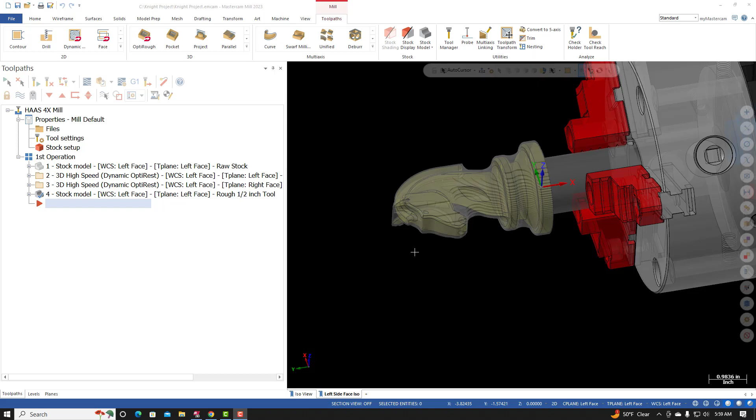Now that we've completed the roughing toolpaths with the 1/2" flat end mill, I can see that I have material left over underneath the chin and around the base. So what we'll do is we'll come in with a smaller flat end mill and we'll focus on just these areas. Inside Canvas, I'm going to the roughing toolpaths with a 3/16 end mill.

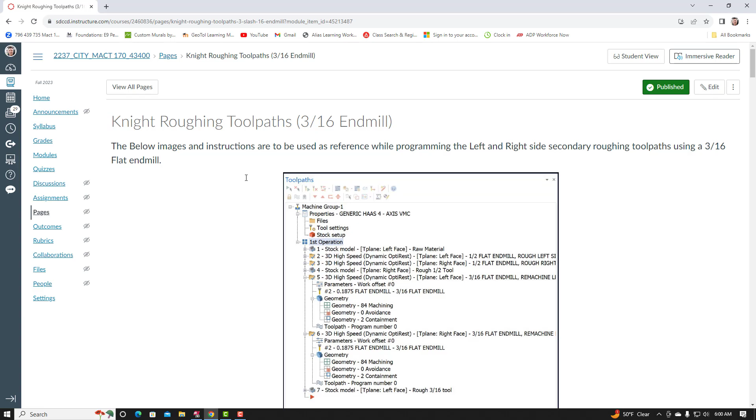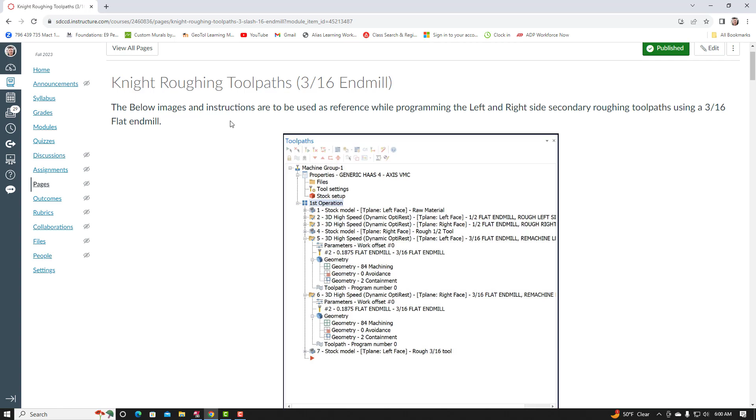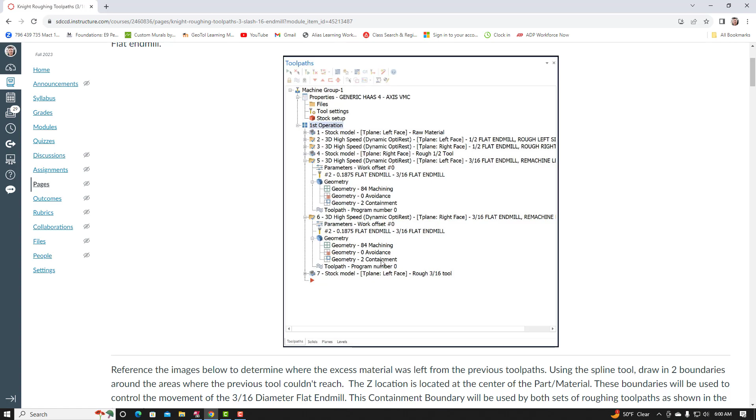This page: the below images and instructions are to be used as reference while programming the left and right side secondary roughing toolpaths using a 3/16 flat end mill. We have an image of the toolpath manager. It has the 2 additional toolpaths added to it. There's some information that we can get from here. It's a 3/16 flat end mill. There will be 2 containment boundaries for these toolpaths.

I'll scroll down. Reference the images below to determine where the excess material is left from the previous toolpaths. Using the spline tool, draw in 2 boundaries around the areas where the previous tool couldn't reach. The Z location is located at the center of the part material. These boundaries will be used to control the movement of the 3/16 diameter flat end mill. This containment boundary will be used by both sets of roughing toolpaths as shown in the image below.

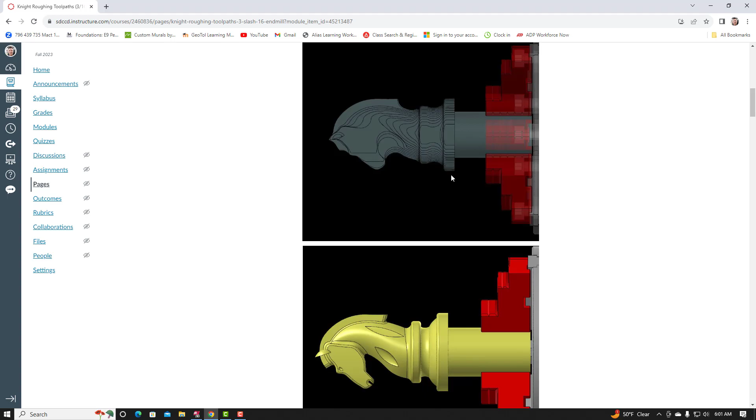So we have a few images to reference. Here is the part after the 1/2" flat end mill roughing toolpath. Here's what the finished part will look like. Here we have an overlay, where we can see the material that was left behind, and we can see these light blue splines drawn in, and they capture the area where the excess material is still located.

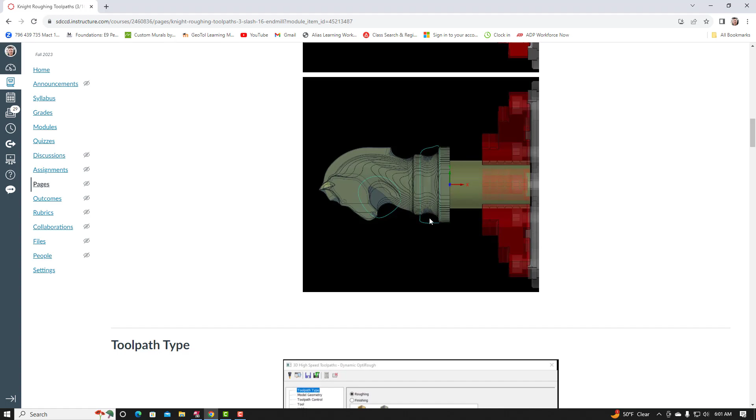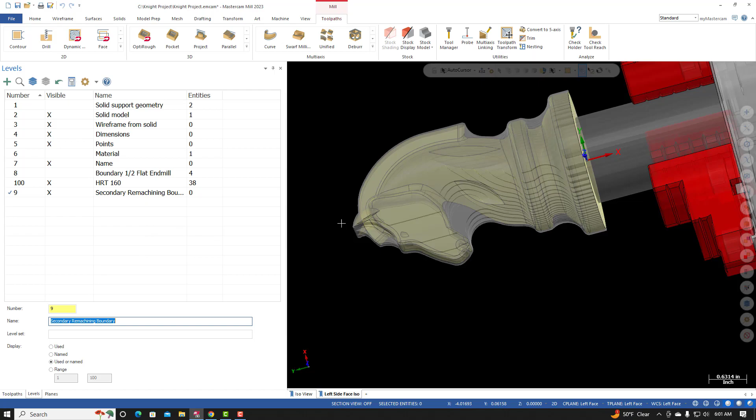So I'm going to go into Mastercam. I'm going to go to my level manager. I'm going to create a new level and call it secondary machining boundary, or remachining boundary. I'm going to look at it from a top view, and I'm going to draw in 2 splines that capture these areas.

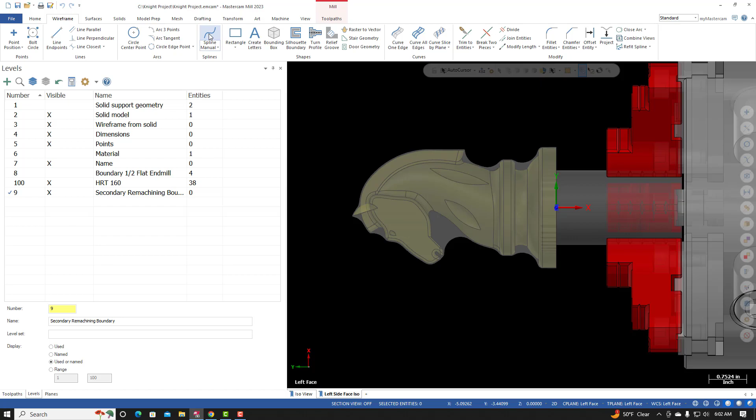I'm set to a 2D construction plane, and I'm going to set my wireframe color to this light blue. I'm going to try and match what I'm seeing in the Canvas page. From the wireframe tab, I'm using the spline tool. Now be careful, your auto cursor will lock on to things, so what I try to do is avoid locking on to existing geometry.

So I'll start here, and I'm going to create a window that captures this area. And if you see your cursor lock onto something, move it away and then select away from the areas that the cursor wants to lock onto. And then when you get close to completing the circle, it will lock onto the last point. That will close the spline.

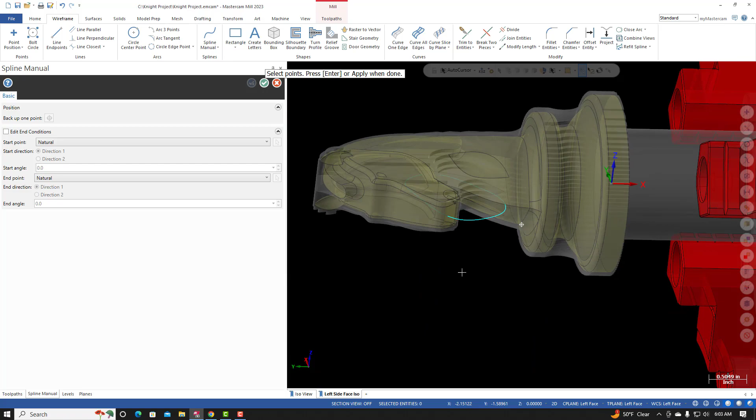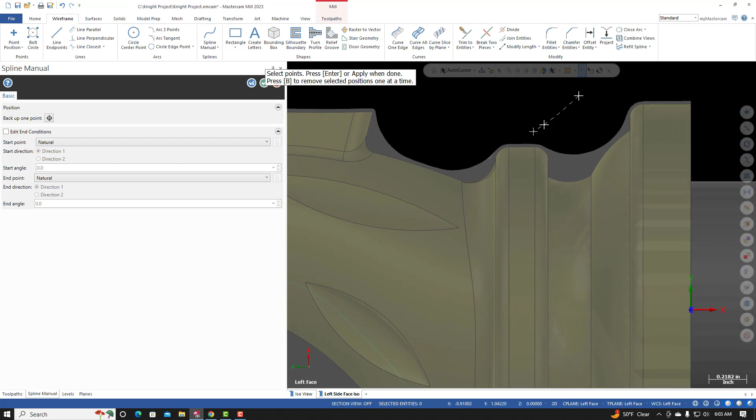And if I tumble my view, you can see that it is a 2D spline. It's all on the same Z level. If it starts to move around, if you're locking onto things, it will turn into a 3-dimensional item. So I'll go back to the top view again. I'm now going to create that spline around this area. So go back to the spline tool. And once again, you can see how it's locking on things. So I'm going to double up the points right there.

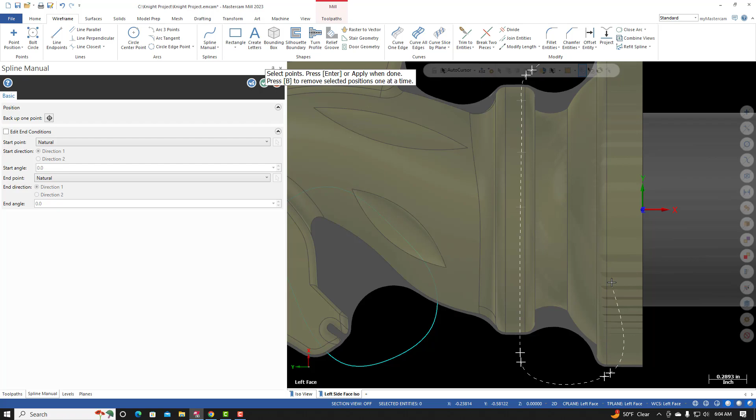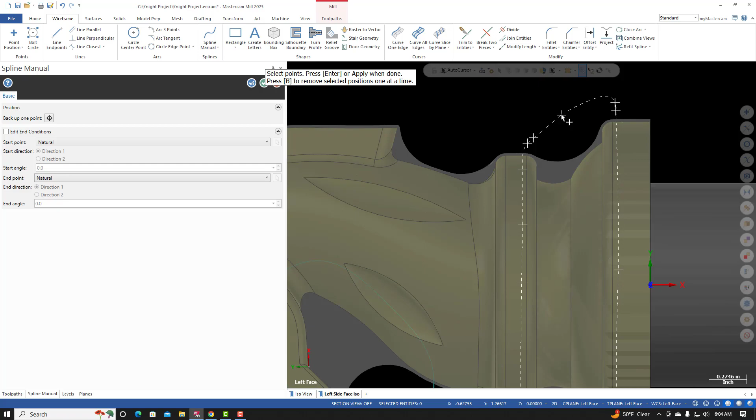It doesn't need to be precise. And I'm going to try and keep it so that it's not too wild, like right here, it's trying to lock on to that. And you have to double up the points at the corners, otherwise it'll get a very extreme arc. So I'll just click there. That'll control the curvature. Here I'll lock onto the point, and that will complete the splines for the containment boundaries.

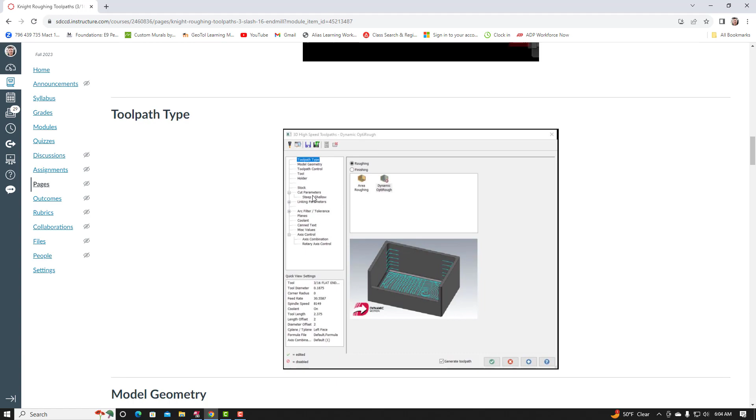I'll select OK. I'll go back to the project page, and we have the pages for the toolpath that we're going to use. We're going to use the OptiRough toolpath again. So I'll go back to Mastercam. I'll go to the toolpath tab, and in the 3D toolpath section I'm using OptiRough.

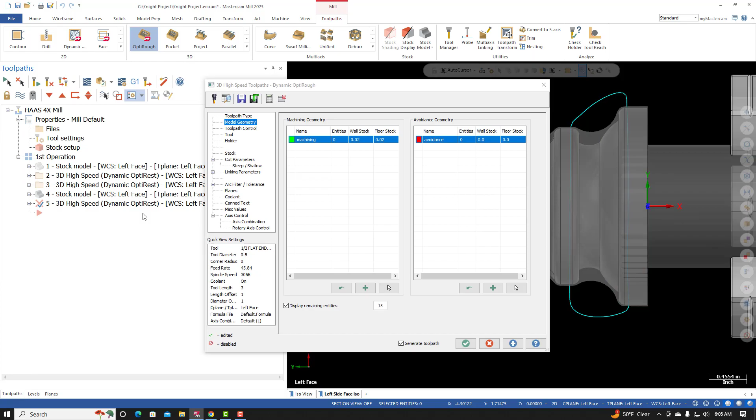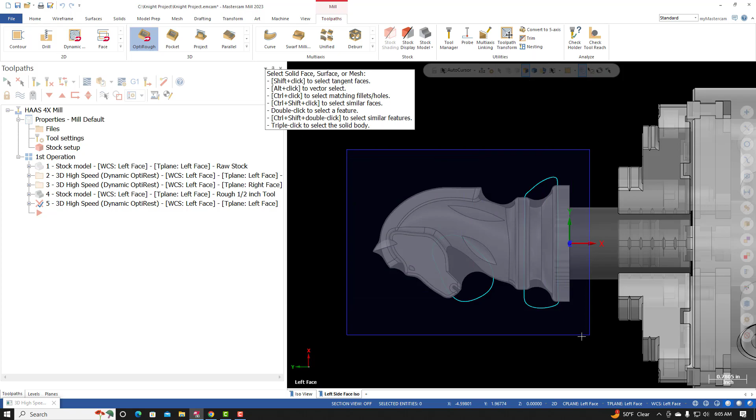For the model geometry, I'm going to select the entire part. So I'll select the Select Entities icon. I'm going to window select the part. You could have triple clicked; there are several ways to select a solid part or a solid model. I did a window select. It ignored the stock model, it ignored my boundaries.

I'll select End Selection, and once again I have 82 entities. I'm leaving 20 thousandths on the walls and 20 thousandths on the floors. I'm now going to start referencing the pages on the project page and matching the settings according to what we see on the project page.

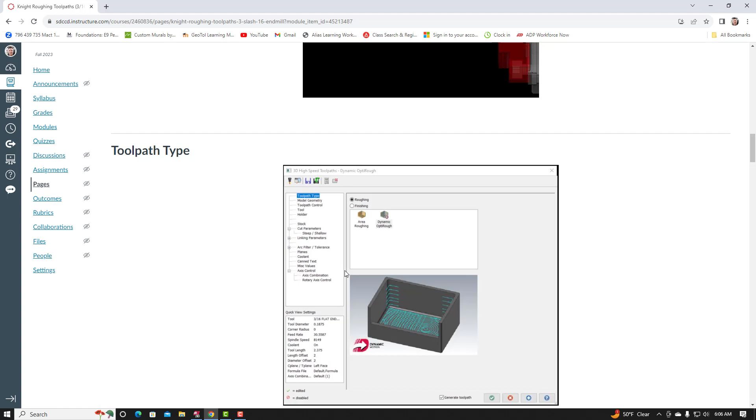So for the toolpath, it is a dynamic OptiRough roughing. For the model geometry, we selected the part, the solid model that represents the knight. For the tool control,

we're going to use two boundaries, and we're going to allow the tool to travel to the center. The center line of the tool will be allowed to travel up to the containment boundary. So I have it set to center.

For boundary chains, containment boundaries, I'm going to use this spline and this spline. And I'll select OK. That will take care of all the settings for this page.

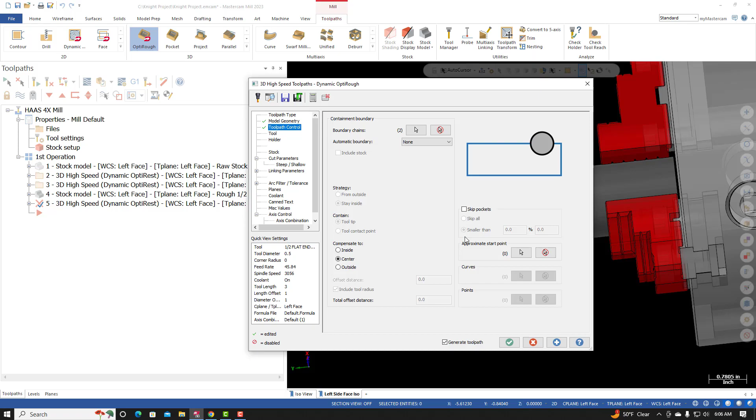Go to the tool. We're going to add a 3/16 flat end mill to our tool list. So select Library Tool.

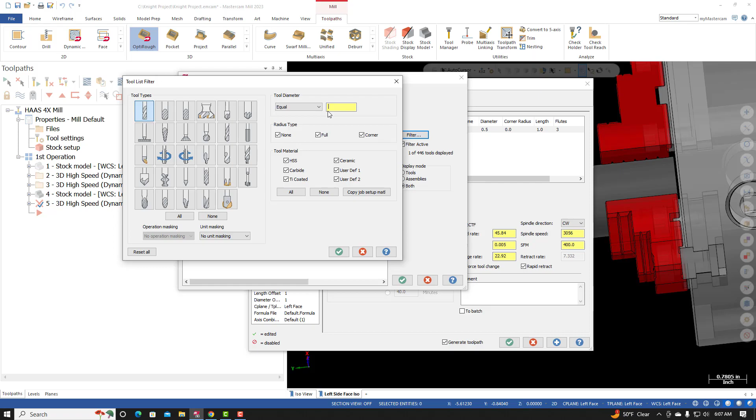My filter is still active from the last time that we selected a tool, so I'll select the filter icon. I'm still looking for a flat end mill. This time I'm looking for one that's equal to 0.1875 or 3/16 of an inch.

I'll select OK. There's one tool that matches that description. I'll double click on the tool and it should be added to my tool list as tool number 2. I'm getting this error again, or this warning. I'll select OK. I'll select 6061 aluminum. I'll select OK again.

And it changed my SFM, but I'm going to edit the tool before I make any adjustments down here. So right click on the tool, select Edit Tool.

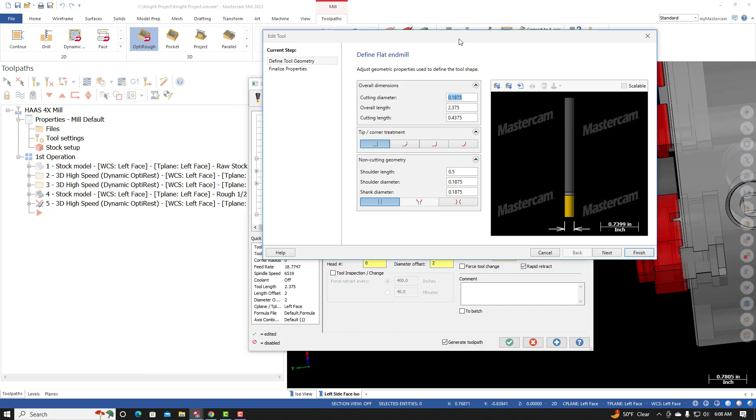On this page, I believe the default settings will work for us. Something we might want to be aware of is the length of cut.

So what we would need to do is actually measure the length of cut of the tool that we have in our tool crib. I'm going to change this so that the length of cut is 3/4 of an inch. So I'm going to go to cutting length, but before I can change the cutter length, I need to change the shoulder length. So let's change the shoulder length to 1, and then the cutter length to 0.75.

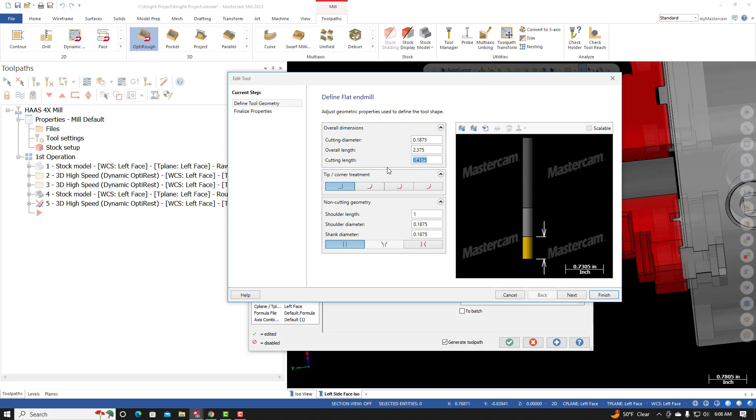From here I'll go to next. The number of flutes I'll set to 3. And then I'm going to turn the coolant on at this level. That way the coolant will be turned on for all following tool paths that use this tool. I'll select Finish.

Back to my tool page, I'm going to set the cutting speed to 400, not 4,400. I'm going to set my FPT equal to 1% of the tool diameter, so 0.1875 times 0.01. And then I'll set my plunge rate to half the calculated feed rate, so 45.84. Divide that by 2. And then I'm going to copy the tool name.

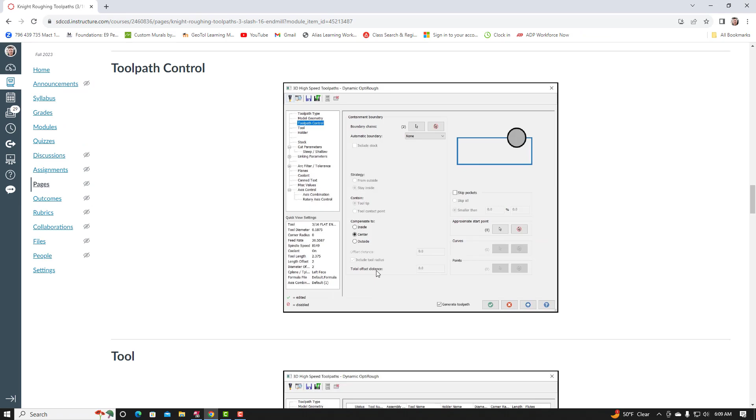And I'll reference the project page for the note. Remachine left side. All caps, remachine left side. And that will complete all of the changes that we need to make to this page.

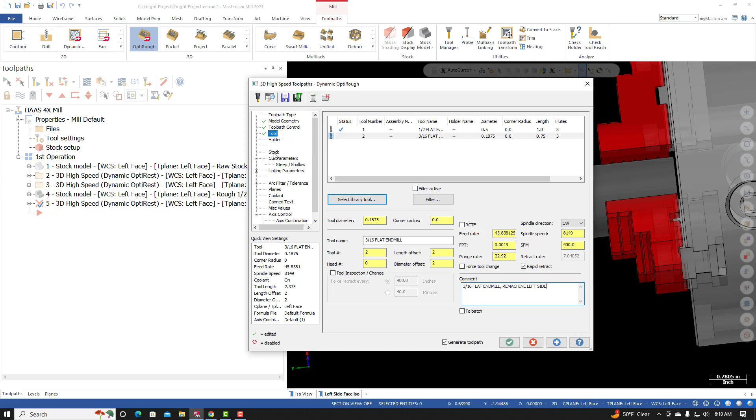From here, we're going to jump down to the stock. I'll reference the project page for the settings for the stock page. Previous operation, one other operation, and we have selected, or I'm going to select the stock model that reflects what the previous two toolpaths have done.

So I'll select this stock model. This is telling Mastercam what the part looks like prior to this toolpath doing its machining. That'll take care of all the settings that I need to change on this page. Go to cut parameters.

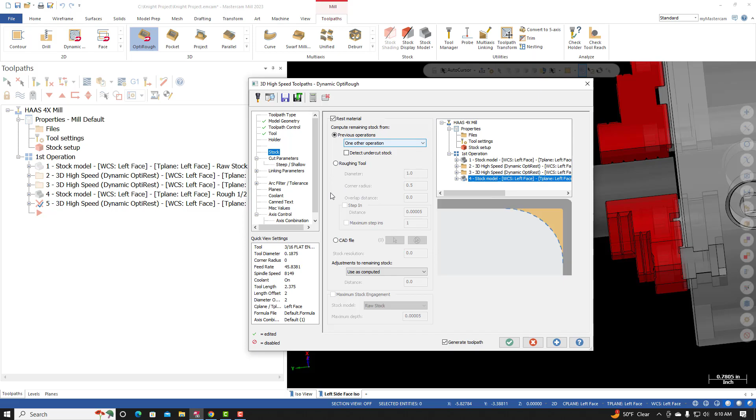Let's set the step over distance to 15%. The step down, I've got it set at 21%, give or take. And the step over is a little bit greater here too, so let's use these settings. I'll call this 32, I'll call this 21, and then the minimum toolpath radius is 15. So 31, or 32, 22, something in that neighborhood.

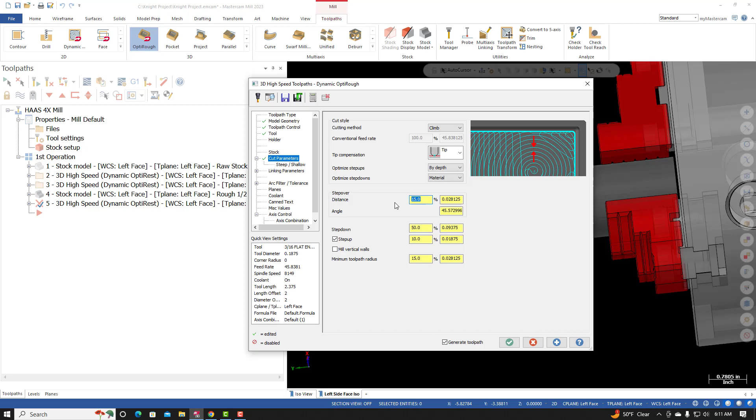We're going to round up. Say 32, 22.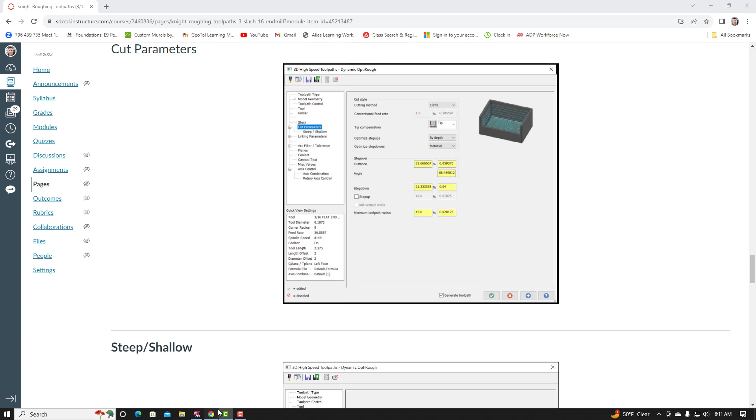I'll keep step up turned on. It's not activated here, but I'm going to actually activate it. So I'm going to have step up set to 10%. And then I'm going to have my minimum toolpath radius set to 15. So that'll take care of all of the changes that I need to make on this page.

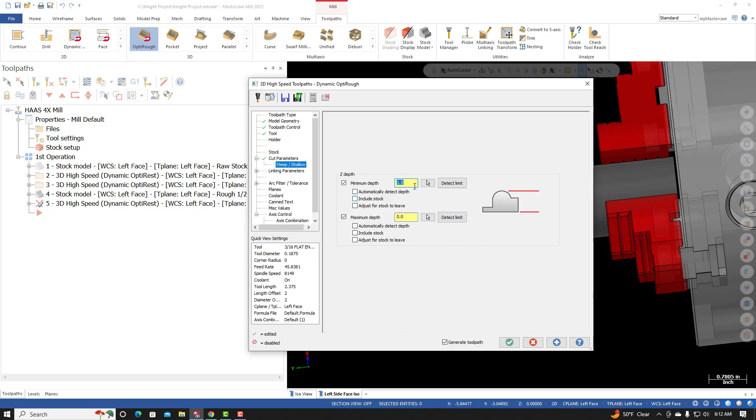For steep shallow, I'm going to reference the project page. We're at 0 and 1.5. These values were carried over from the previous toolpath, so 1.5, this will be more than enough. The top of the part after roughing is no greater than, say, 1.2 at this time. So in reality, all I need to do is set this to 1.5 and we should be good.

From here, I'll go to linking parameters, and I'm going to reference the linking parameters on the project page. We're using minimal vertical retract, a clearance plane of 2 inches, and then the back feed rate is set to 400.

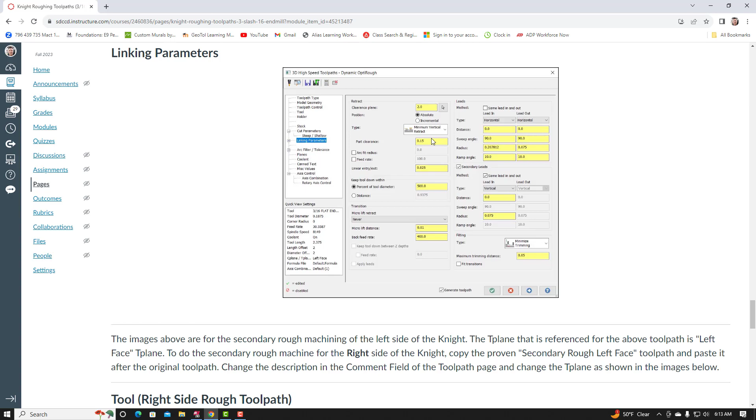Minimal vertical retract, back feed rate set to 400, matching the other settings. I believe these are default settings. The only thing I'm actually changing, or verifying, is that the clearance plane is the same. The part clearance is 0.15, minimum vertical retract is being used, and my back feed rate is set to 400.

That should take care of all the settings on this page. From here, we're going to double check the planes and make sure everything's set to left face. That checks out, I'll select OK.

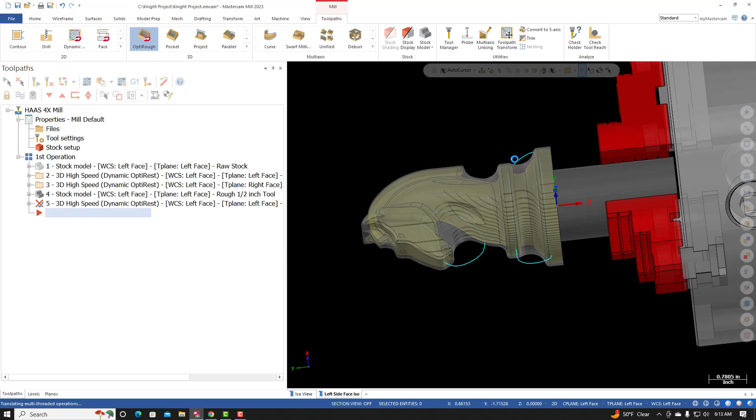Mastercam is going to process the toolpath, and what it's going to do is focus on just these areas that we've defined with these splines. It's doing a lot of jumping around, so what's happening is it's machining by Z level. It goes to one Z level, then jumps over here and machines the same Z level.

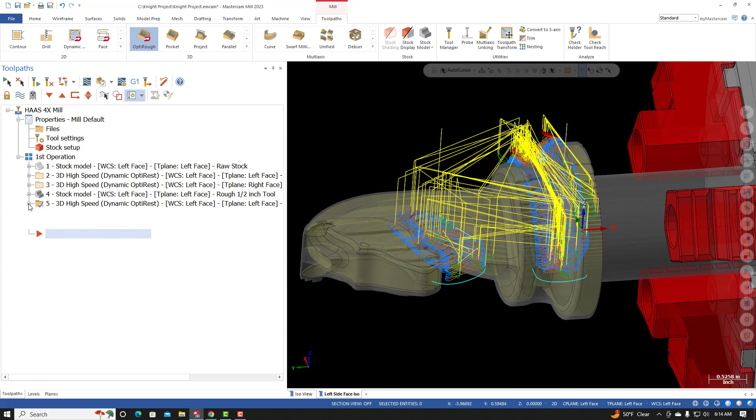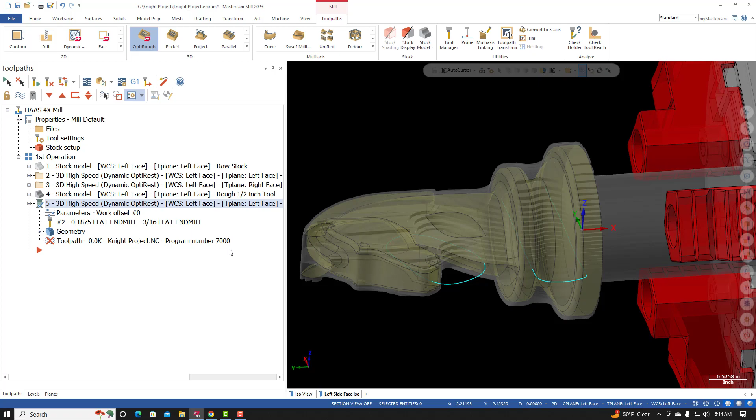I believe we can make this a little bit more efficient. If I go back into the settings, where it says optimize step-ups, next closest, let's try that. So go back to cut parameters, next closest, select OK. It'll take a moment to regenerate or process the toolpath. This is a little bit better.

It's going to focus on one area and then move over to the next. I believe that looks good.

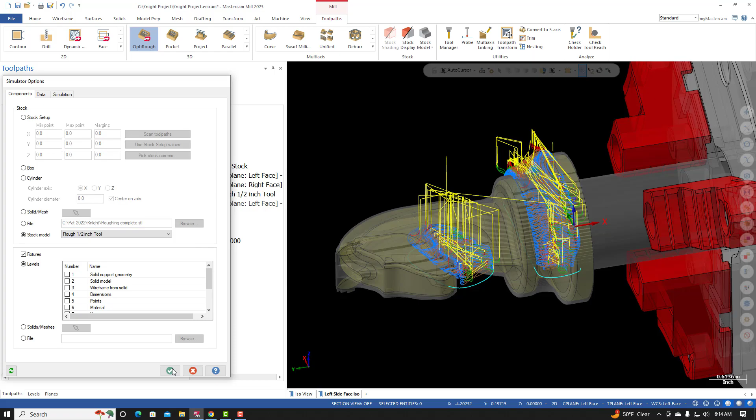From here, I'm going to update my stock for verify. I'll go to simulator options. I'm going to use the stock model from the previous set of toolpaths. I'll select OK. I'm going to save my work, and now with just this toolpath selected, I'll run verify.

Once we open verify, make sure that stop condition collision is activated. I'll select play, and I'm going to speed this up a little bit.

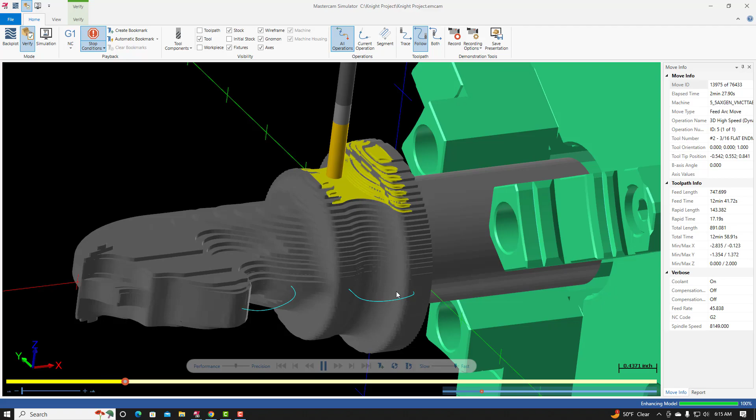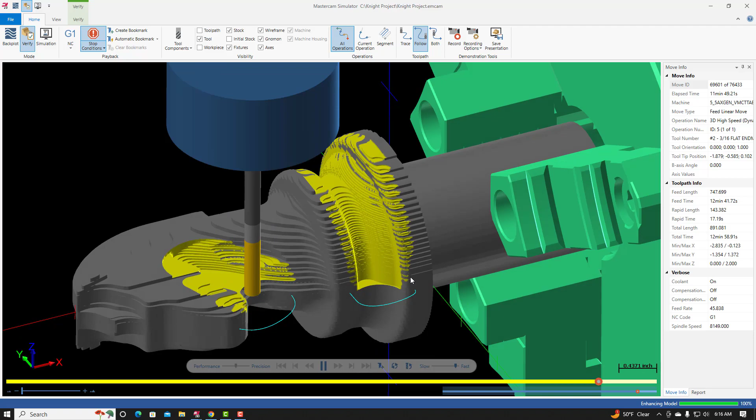Now, something I might want to consider, you see how it's machining here? I don't need it to machine there, so I could redraw the spline and tighten it up a little bit. Or I could change how the spline is affecting the toolpath. I could say keep inside. So that's something I might change.

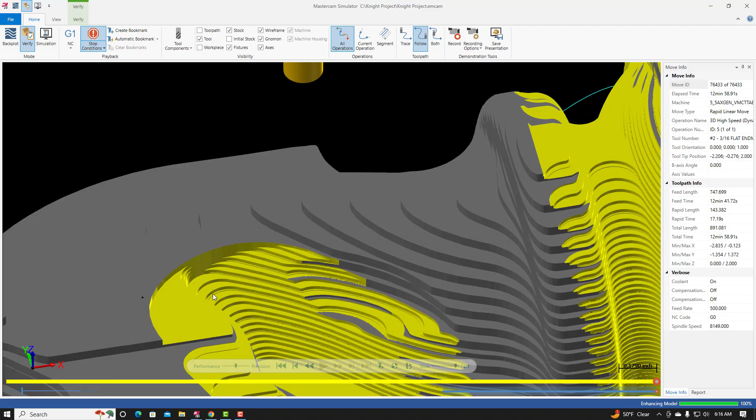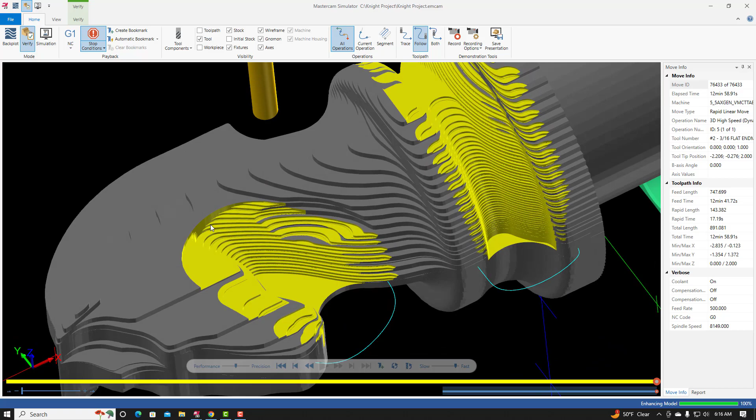I think this looks all right, it's just taking a little bit longer than I would like it to. You can go in and adjust the spline, and that will tell it to either cut a little bit further over here. I can see there's a little bit of material I would probably want to remove, and then it's cutting an area that doesn't necessarily need to be cut. So later on I'll probably go in and readjust these splines, but for now I'm going to leave it the way that it is.

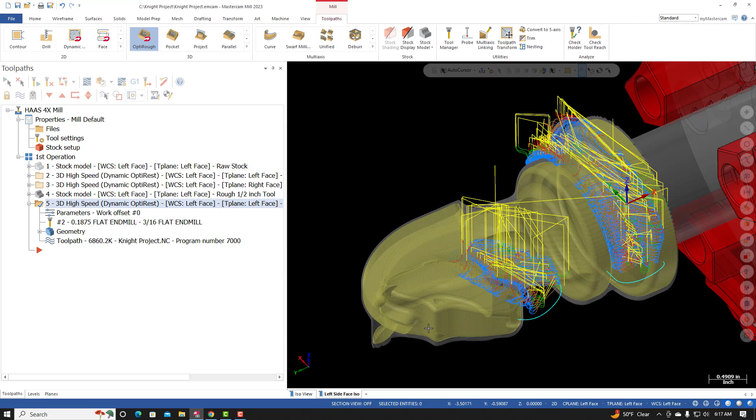So from here I'm going to exit out of verify, and we need to create the toolpath for the other side. Let's go back to the project page.

I'm going to read this. It says the images above are for the secondary rough machining of the left side of the knife. The T-plane referenced for the above toolpath is left face T-plane. To do the secondary rough machine for the right side of the knife, copy the proven secondary rough left toolpath and paste it after the original toolpath. Change the description in the comment field of the toolpath page, and change the T-plane as shown in the images below.

So this is very similar to what we did with the half-inch roughing tool. We're going to copy the toolpath, paste it below, and change some items. We're going to change two things: the description on the tool page, and the tool plane and construction plane to right face.

So I'll go back to Mastercam. I'm going to select just this toolpath, be very careful, select just this toolpath. You can see that the green check is on it. Right click, copy. The insertion arrow is at the very end of the toolpath group. On the insertion arrow, right click, paste.

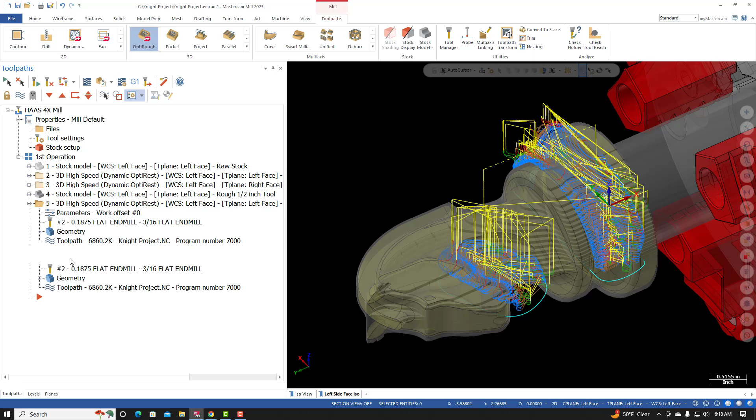In the copied, new toolpath, go to parameters, go up to tool, change the description from machine or remachine left face or left side to remachine right side. Then go down to the planes, and for the tool plane change that to right face, then carry it over to the construction plane. So WCS is left face, tool plane is right face, and construction plane is right face. This will tell Mastercam to rotate the part 180 degrees so it can machine the other side of the part. From here I'll select OK.

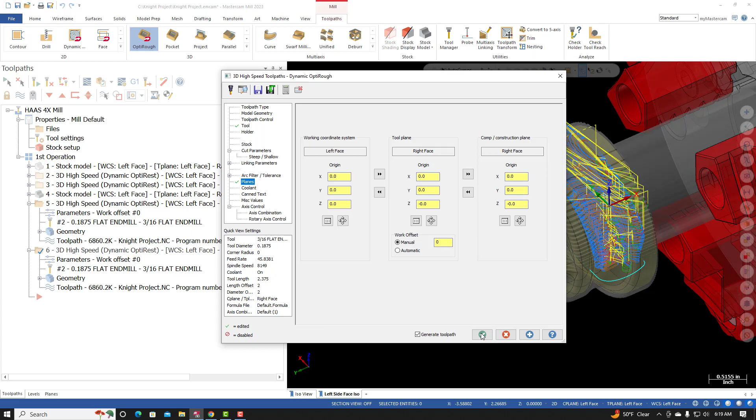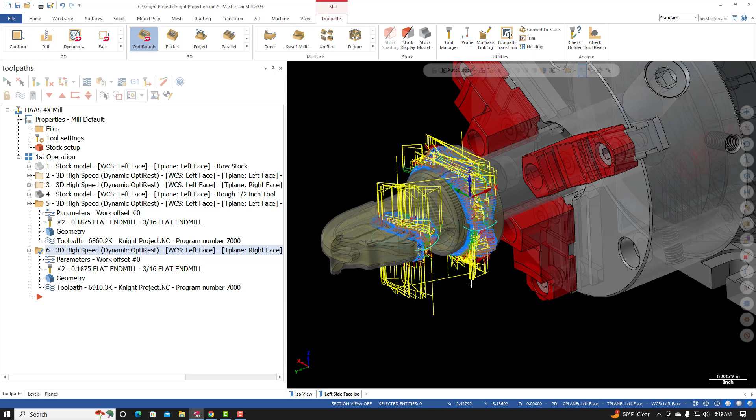It needs to regenerate. This is basically a mirrored image of the toolpath. The geometry is the same, the part is symmetrical. I believe it looks good.

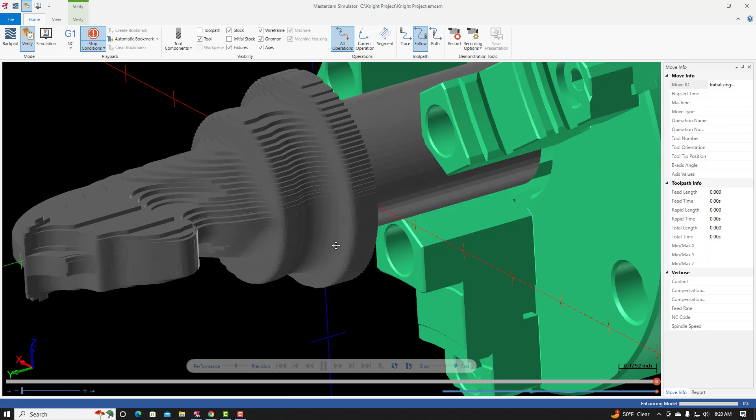So what I'll do in this case is shift select both of these toolpaths. I'll save my work, and I'll open up Verify. Inside of Verify, make sure Stop Condition Collision is still turned on, and then run it. I'm going to speed this up.

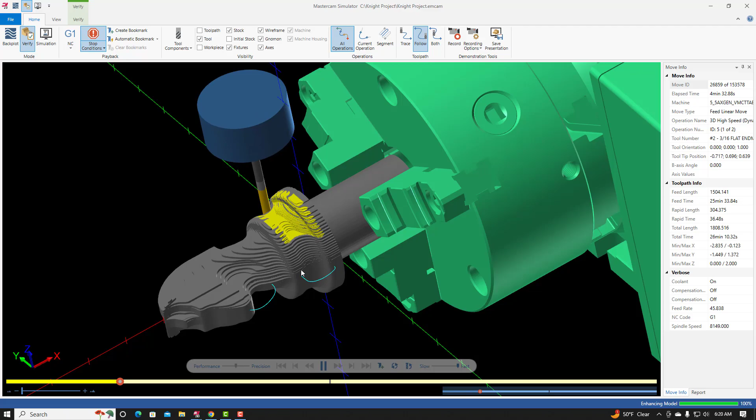And you can see it's removing the excess material that the half-inch tool couldn't reach on the base. It's important that we do that, because that would cause problems for the next tool that we're going to machine this part with.

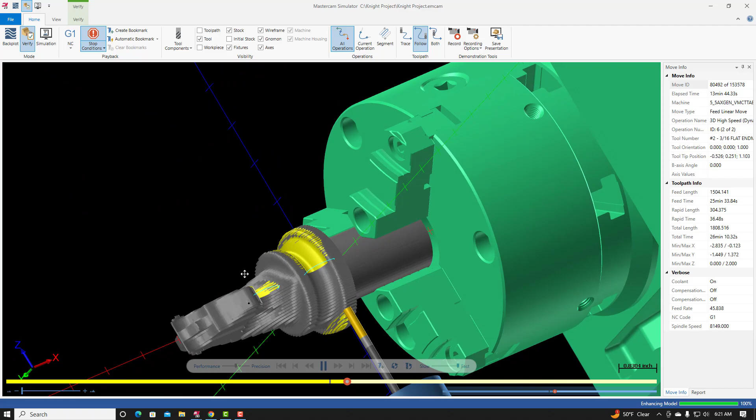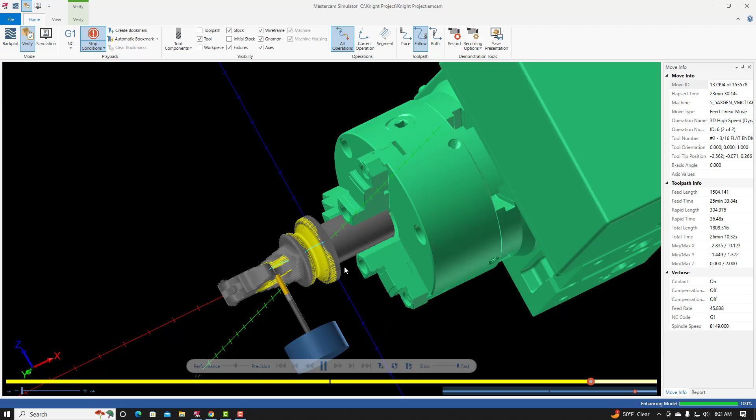It then moves over to the other side. On the machine, what would happen is that the part would rotate 180 degrees. We've already verified that, we posted out the 1/2 inch diameter tool paths, and we can see the A rotation. It starts at A0. The left face coordinate system establishes A0, and then the right face is 180 degrees from the left face, so it's going to call a 180 in the program.

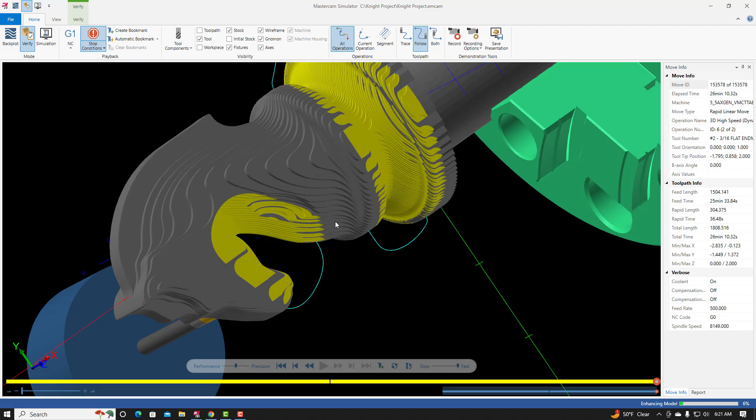Now if I zoom in, you can see that the tool was able to get underneath the chin, and it was able to machine the extra material along the base. So this is going to complete the roughing tool paths with the 3/16 flat end mill for the left and right side. We still need to come in here and remove some of the extra material between the ears.

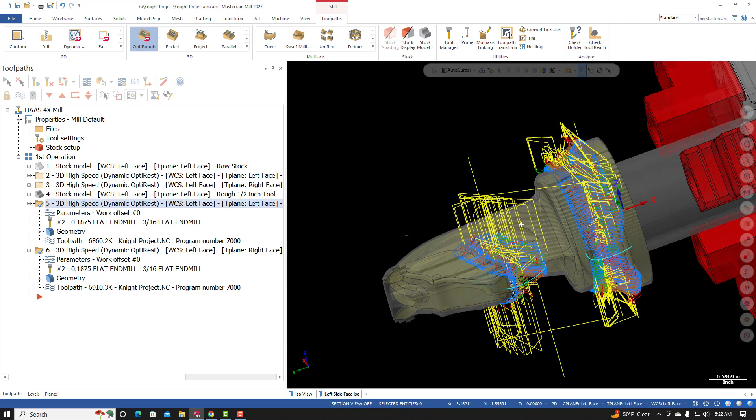So at this time I'm going to exit out of Verify. I'm going to toggle off the visibility of those tool paths. I'm going to toggle off the visibility of the stock model from the 1/2 inch roughing tools. I no longer need to see these containment boundaries, so I'll go to my level manager and I'm going to turn off the visibility of the secondary remachining boundaries.

You cannot turn off an active level, so I'll make the solid model level the active level, and then I'll make the secondary remachining boundaries or boundary invisible. I'll go back to the toolpath manager.

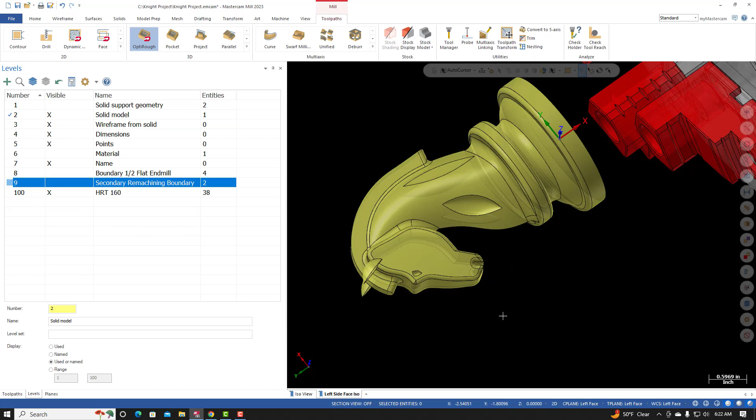We're going to generate a stock model that shows what these two toolpaths have done. To do that, insertion arrow at the very end of the toolpath group, go to the toolpath tab, stock model. I'll call this one remachine 3/16, or remachine with a 3/16 flat end mill.

For the initial stock shape, what did the part look like prior to these tool paths? We have a stock model that shows us that, so I'm using the rough 1/2 inch tool stock model. And then what tool paths are doing the work?

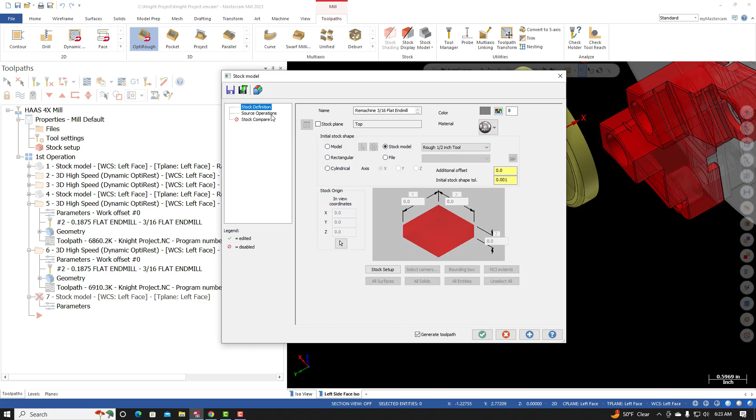So go to source operation and then shift select or control select the two tool paths that are using the 3/16 flat end mill. From here I'll select OK. It'll take a moment to process.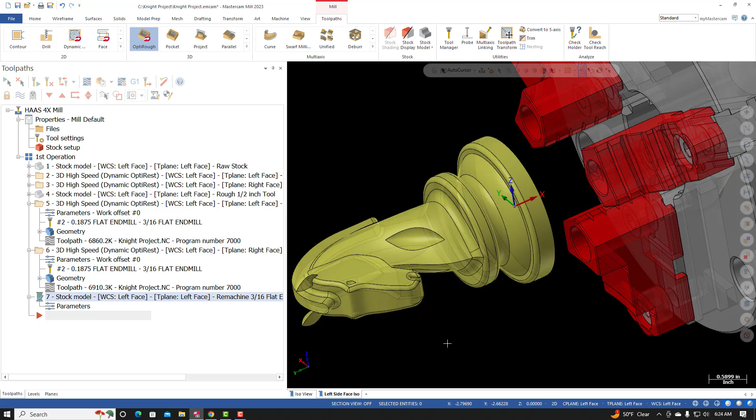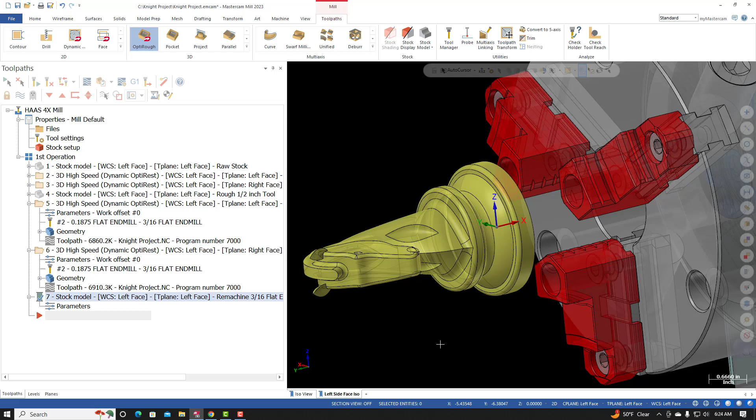So after we complete these two tool paths, we're going to come in and we're going to machine, we're going to rotate the rotary so that we can access the area between the ears. Once again, so now the stock model is visible.

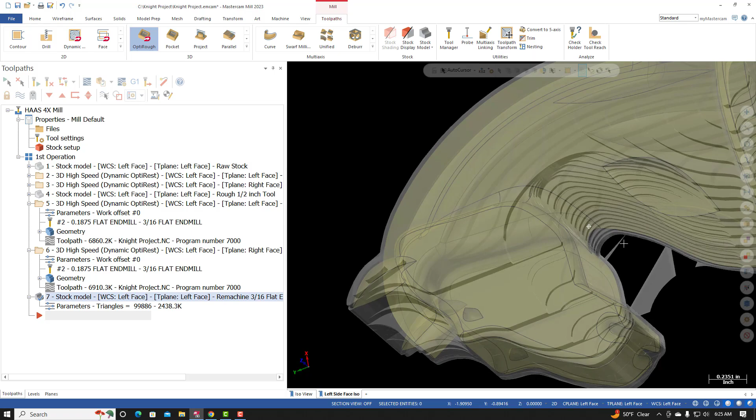There's some issues with the calculation. That's zero thickness material. I'll probably go in and on my steep shallow tell it to go 5 thousandths below just to eliminate that problem. So these two tool paths have removed this material and this material.

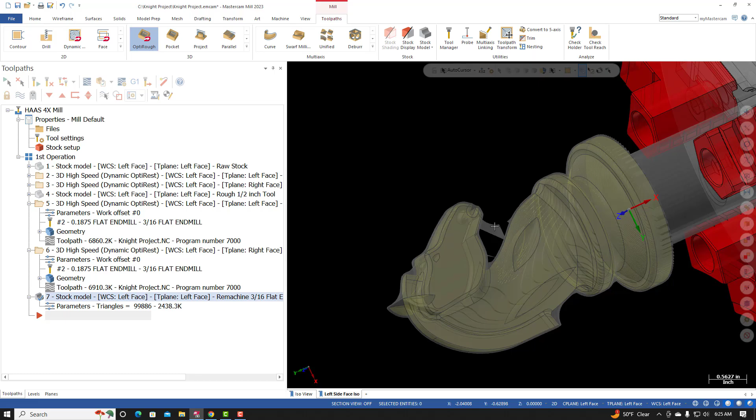We're now going to use something very similar. We're going to actually copy and paste one of these tool paths and use it to clean up the area, or the extra material that's between the ears. So from here, I'm going to save my work.

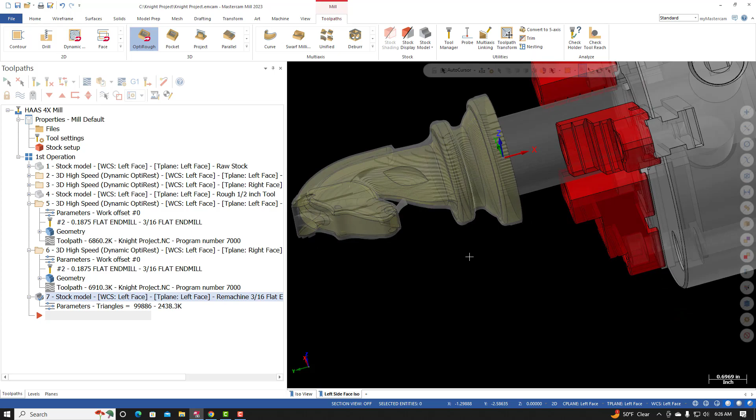And this will not be an issue, but if it is bothering you, go back to your steep shallow and tell it to go 5 thousandths below. You can do it on 1 and it will take care of that issue.

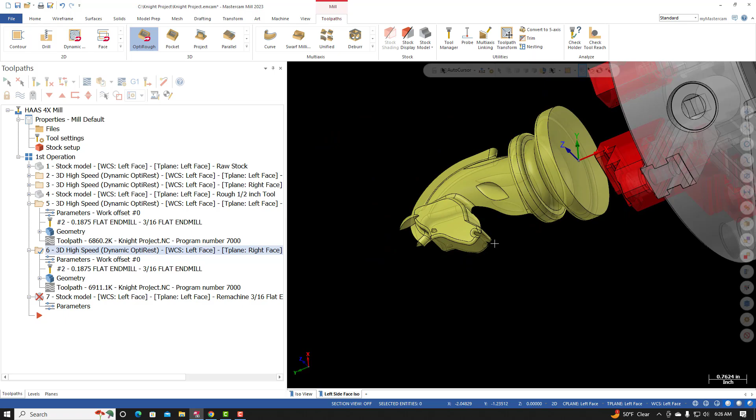So I made that change, and it's going to regenerate the toolpath, and it's also going to regenerate the stock model, and it should remove that little zero thickness piece of material that was visible on the stock model. That did not show up in Verify. It was just a Mastercam issue. There shouldn't have been any material left behind.

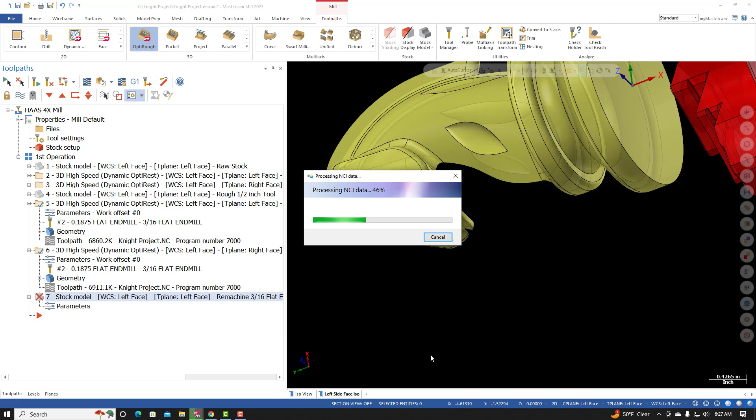So it's going to reprocess this, and then we'll see what the stock model looks like at that time. Oh, I didn't regenerate, so it still needs to be regenerated. I'll select it and regenerate all selected operations. This will probably take a moment.

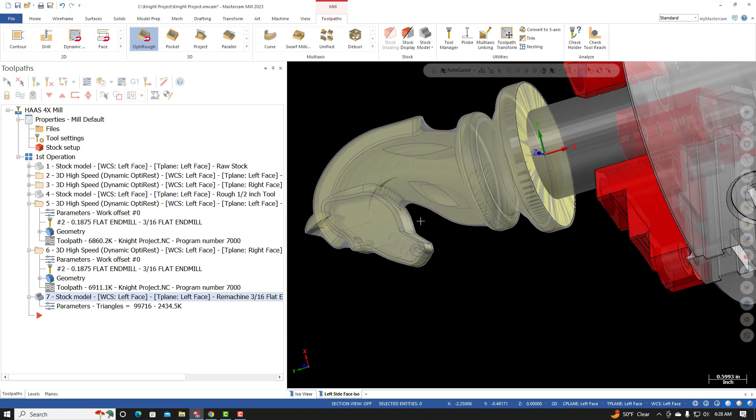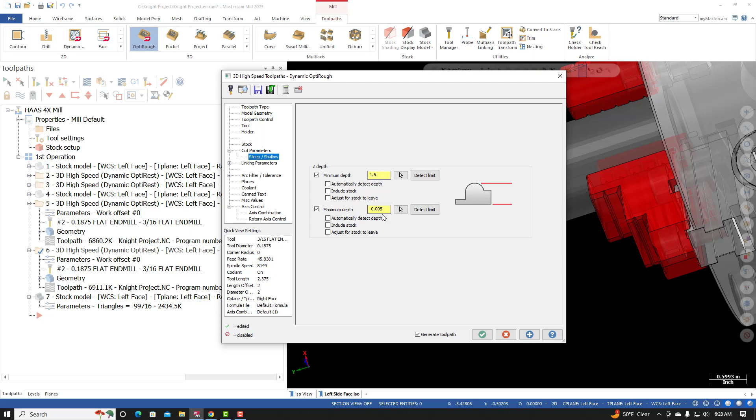So it's done regenerating the stock model, and you can now see that that extra material has been removed. So if you were getting that problem, or if you were having that and it was an issue for you, go into the steep shallow of the right face toolpath and just tell it to go to the steep shallow and the maximum depth, increase it by 5 thousandths, go to Z minus, or minus 0.005, and that should fix the problem.

So from here, we're ready to move on to the tool paths where we remove the extra material between the ears.